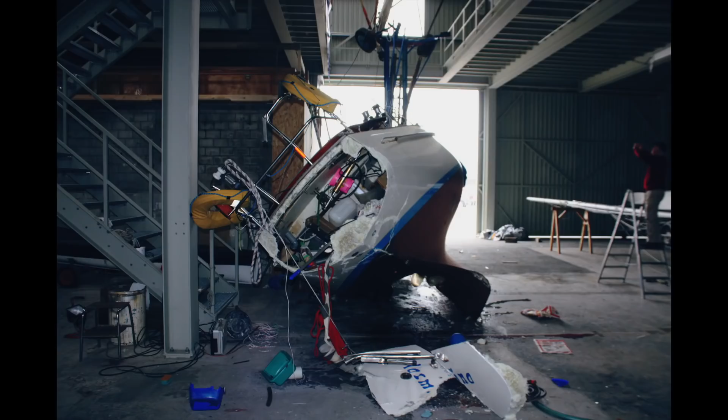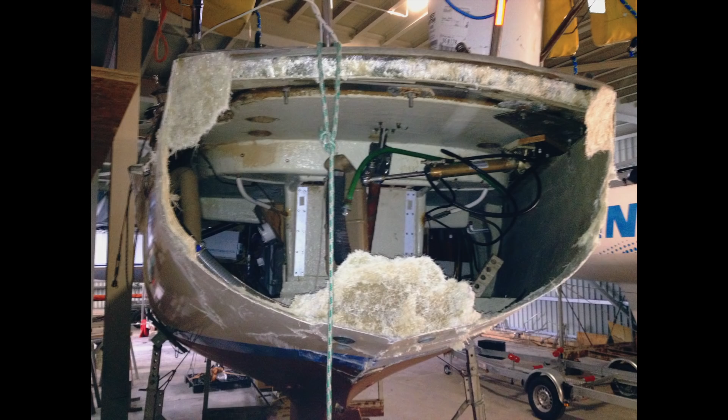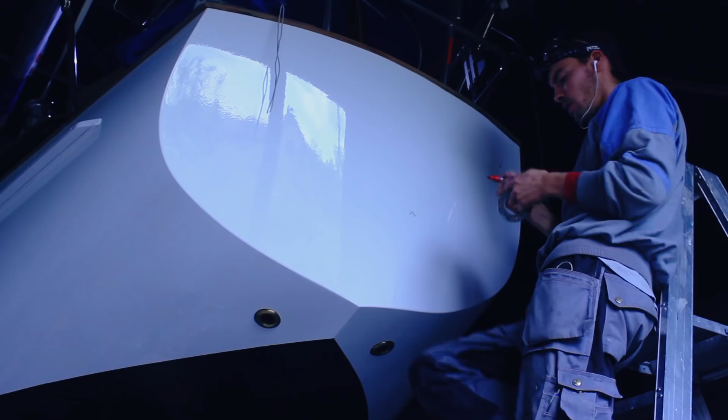In case you're new here, I bought Magic Carpet, a Vindö 32, four years ago. When I bought her, she was a total shipwreck. She had fallen 20 feet from a crane onto concrete. The stern completely blew off, there was a huge crack in the side, the keel was damaged, and the rudder was crushed. At the time, I had just begun a 3-year boat building apprenticeship in Switzerland, so in my spare time I worked on restoring Magic Carpet. Four years later, she's now finally finished and sailing around the Mediterranean.

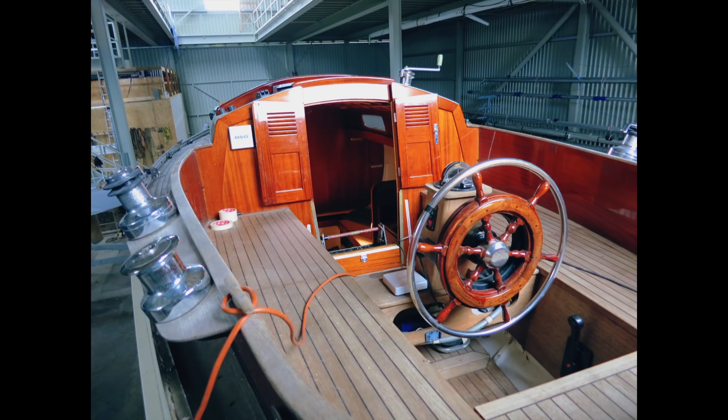During the restoration itself, I didn't take any footage, but this mini-series from the Sailing Magic Carpet channel is about the thought processes, theories, and techniques that I went through to repair Magic Carpet.

This particular video, episode 3, is about the basic principles of doing a fiberglass repair. I made this video for people who are totally new to the world of fiberglass repairs and who want to get an idea of how they work.

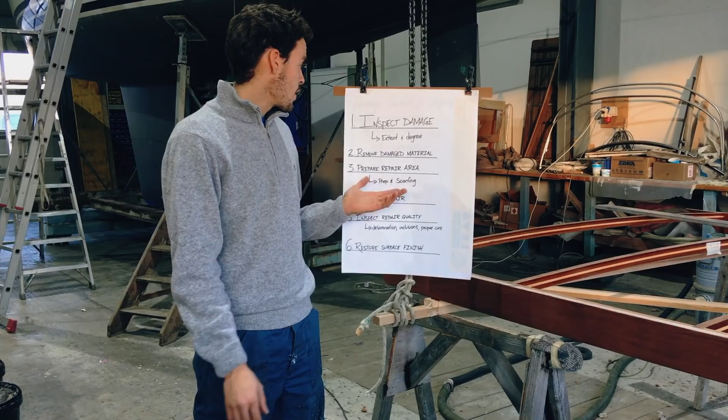I'm going to start by showing you the brief process on how to approach a repair. So this is what you start with: obviously, inspecting the damage. To inspect the damage, you have to get good access to the damaged area. Are there things installed in the boat? Is there maybe something behind it that I don't see? All of that is part of the inspection.

Take a scraper. In my case, the damage was so severe that I don't care about details — if I have to drill another hole or two next to it, it wouldn't change much. If it's a small damage, there might be other tricks, like just knocking on it — how does it sound? Is there some kind of delamination? You don't want to drill a hole to make sure. But in my case, even take the grinder, take some material off with a hammer, really get to know what's behind. Many times with fiberglass, with composite, there are many hidden damages. It might only be a dent on the surface, but it might reach further than that.

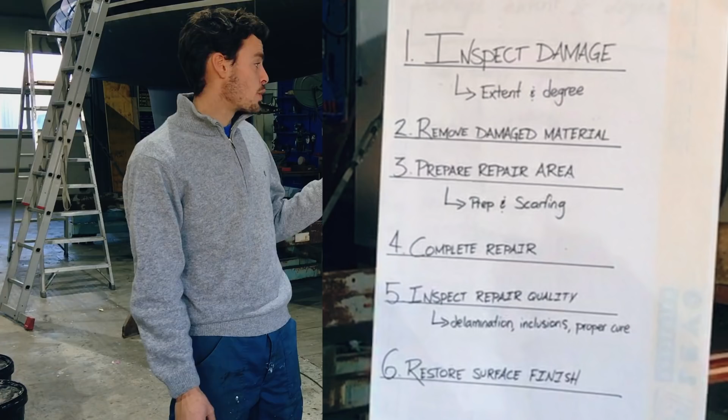So check the extent and degree of the damage. Step 2, remove damaged material. Step 3, preparation of the repair. This is a very important step, which I will dive into further in a bit.

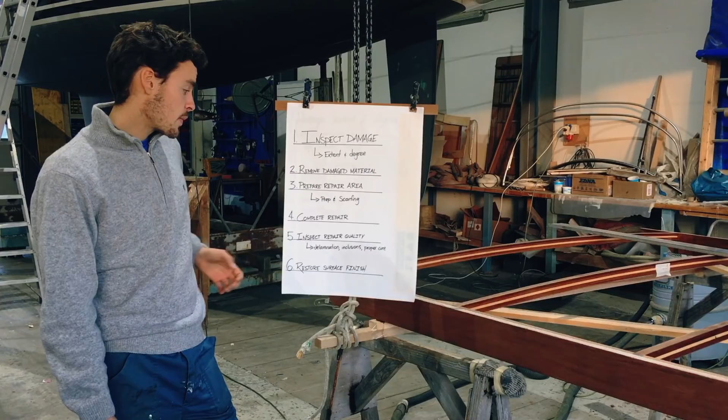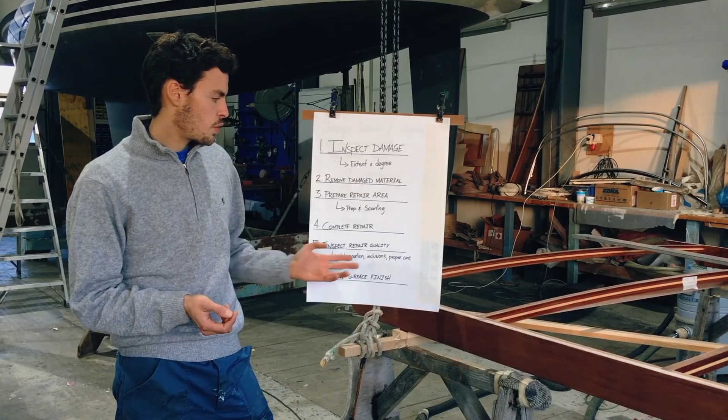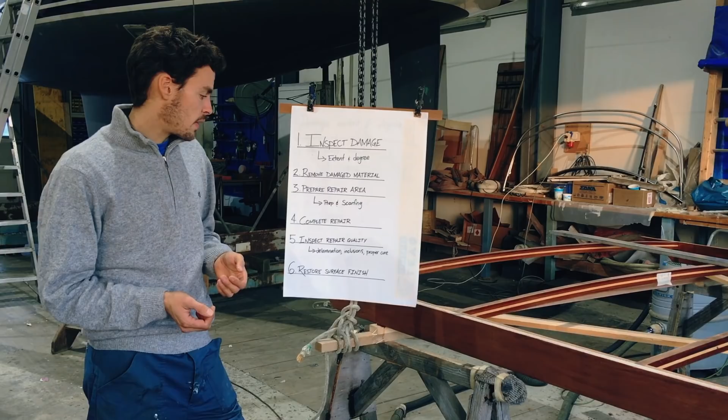Afterwards, complete the repair, and inspect the repair quality. Is there any delamination, inclusions? Did dust go inside, or even air bubbles, which you would not want? And also you check it for proper cure. Was the temperature good? Was it too moist maybe? Was it too cold? Did you get the wrong ratio of hardener and epoxy, or polyester and hardener? Whatever the case, inspection afterwards is just as important.

And step 6 is restoring the surface finish. I plan on making an entire episode just about the surface and the finish, because it includes completely different materials, different tools. But this time, let's focus on the rough part of the repair.

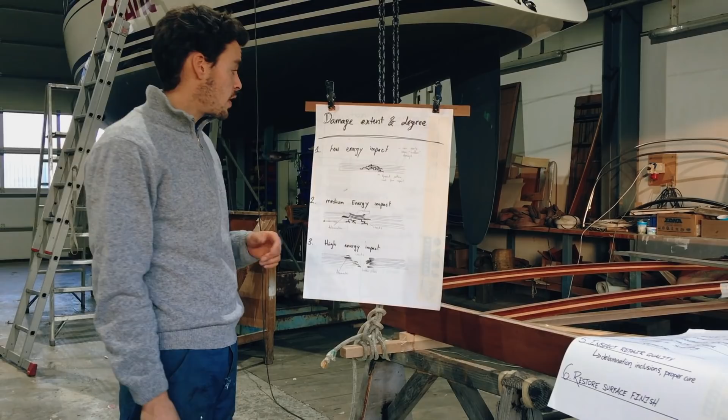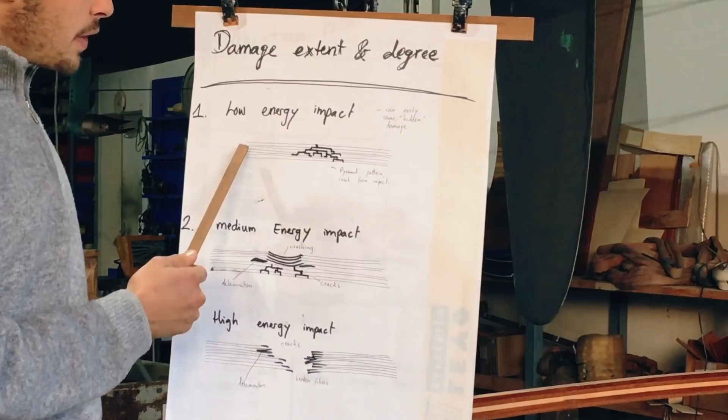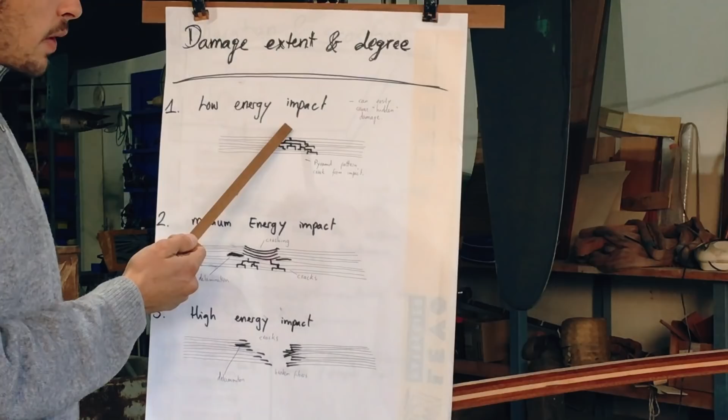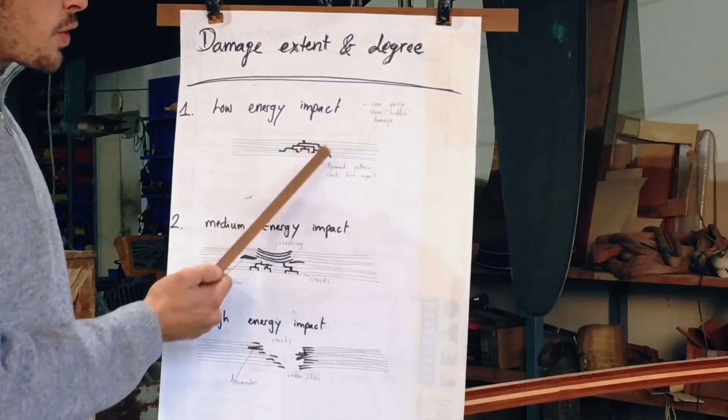So let's dive further into the extent and degree of the damage. I have labeled 3 types of damage here: low energy impact, medium energy impact, and high impact. The low energy impact can easily cause hidden damage. Here displayed we have the layers of fiberglass, and in case of a crack, you might just see a little crack on the surface. But forces tend to travel easily through fiberglass, so it might create this pyramid pattern from just this one crack. So low energy impacts can easily cause hidden damage, since all this is hidden to the eye and you only see that one crack.

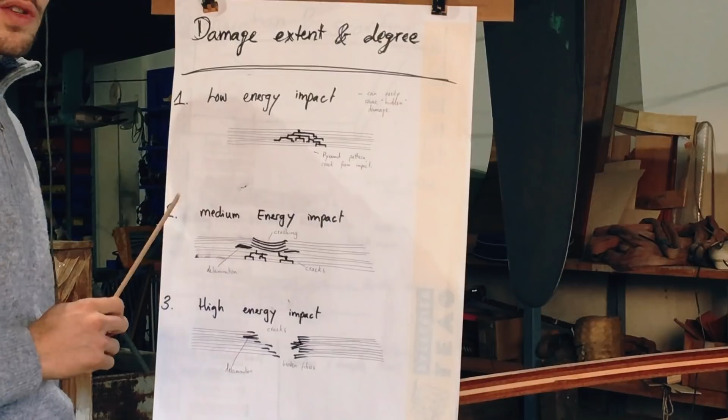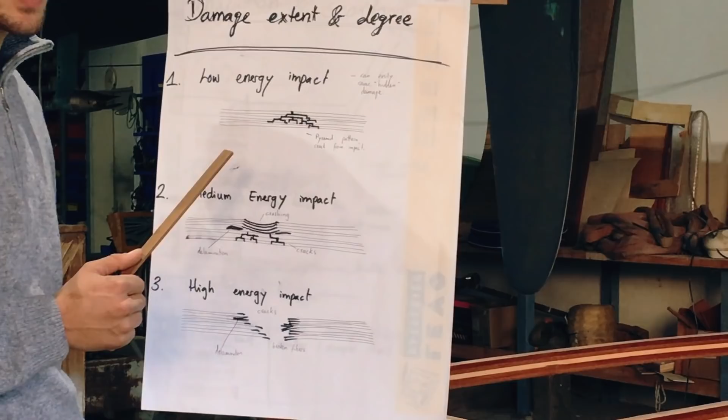So inspection: hammering, sanding a bit. Once you get gel coat and paint off from the surface, you can easily tell if the fiberglass has suffered any damage, if it's not impregnated properly, if it has delaminated, or if there are other cracks. Since fiberglass, depending on what resin you used, it might be kind of yellowish, but instead when it cracked and there is air and delamination in between, it turns white. So you can tell pretty easily upon that.

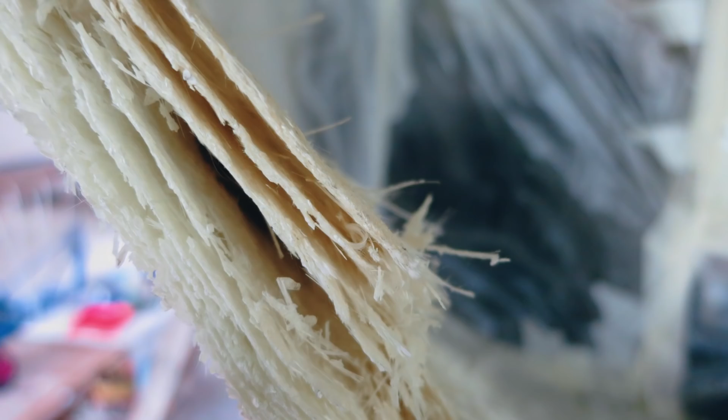A medium energy impact instead is visible to the eye from outside, since you have the area which is crushed. There is a dent, there is a crack, it bumped against something. And here as well, there are cracks inside the fiberglass that reach further than what the eye sees. Also, it is very possible that delamination occurs on the outside area of the crushing. Fiberglass on a finished boat consists of many layers of that woven fabric, so when you get an impact, those might not stick perfectly to each other anymore — they don't have a perfect bonding anymore, so that's what we refer to as delamination.

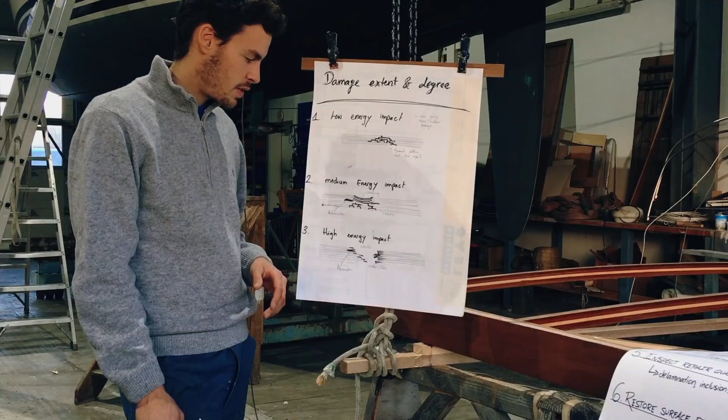Then there is the high energy impact — that's, I think, the case on Magic Carpet. It was all just broken. There are cracks, the fibers are broken, it's through the hull from side to side, delamination — just everything nasty you can think of occurs in that case.

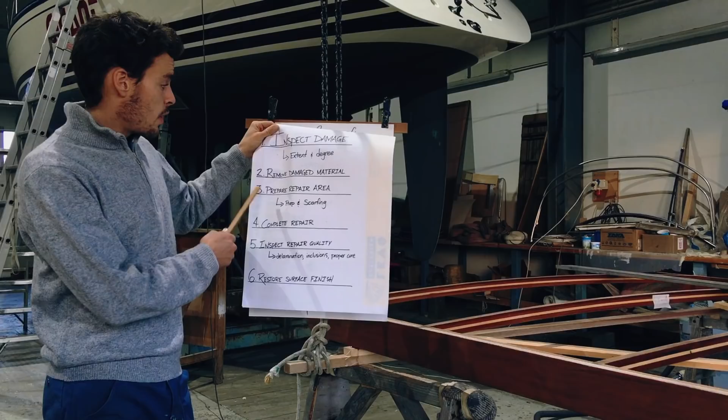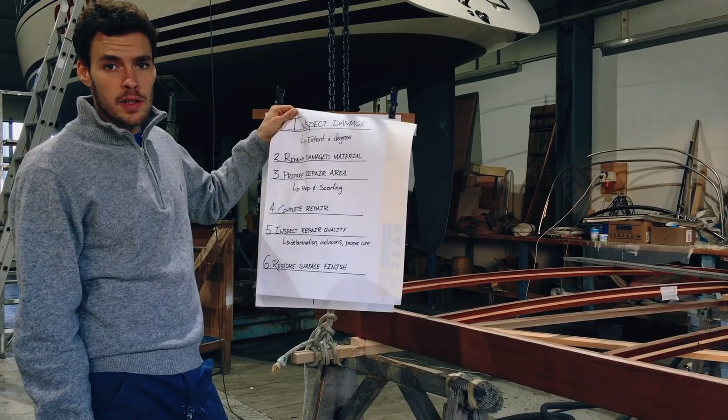Removing the damaged material can be very different depending on the example, on what you have in front of you. In my case, it was a total complete shipwreck, so I went at it with very rough tools - angle grinder specifically, even hammer and chisels - just to get rid of everything that was broken.

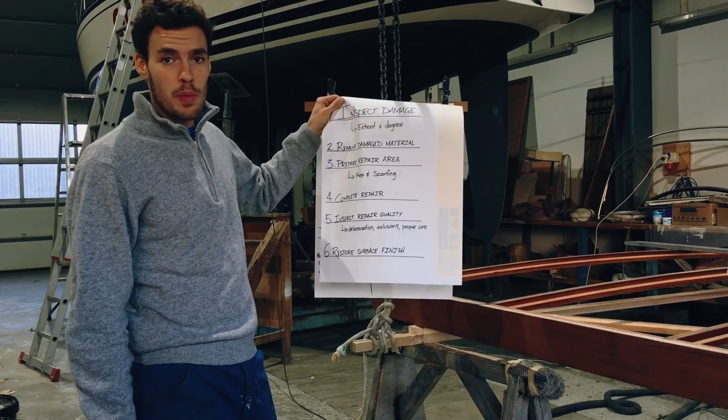Now let's switch to step 3, the preparation of the repair area. Once you have removed all the damaged material, it is very important to prepare that repair area.

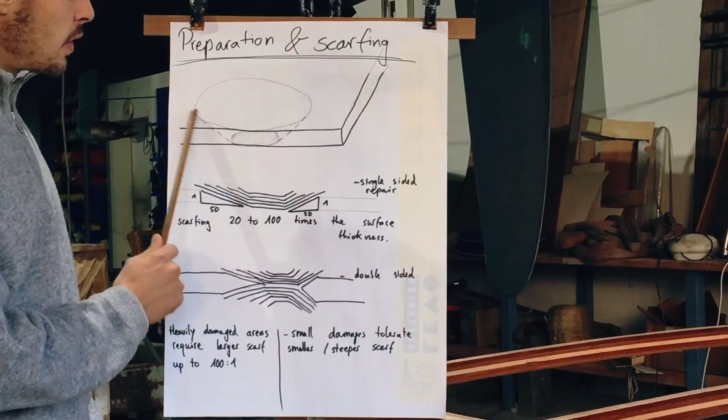One thing is scarfing. That means, depending on the thickness of the fiberglass, you will have to taper the area you repair. There are different methods to approach this.

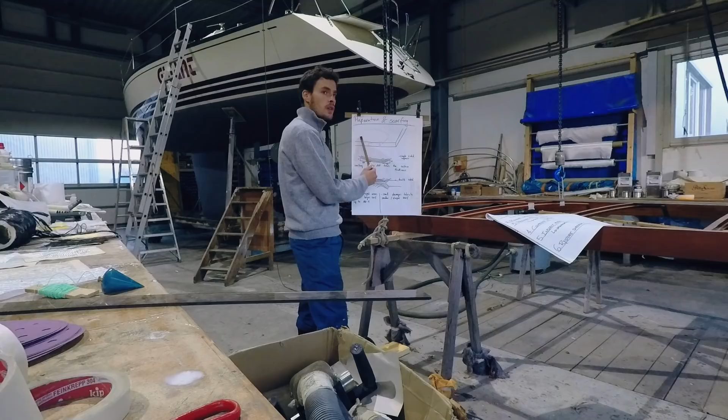One very important thing is you always want to tend to oval shapes when making a repair. If there is any angle or anything square, you have to round it off. Another part of the theory is anything diagonal creates a much bigger surface, and for the best repair you want to give it the biggest surface possible.

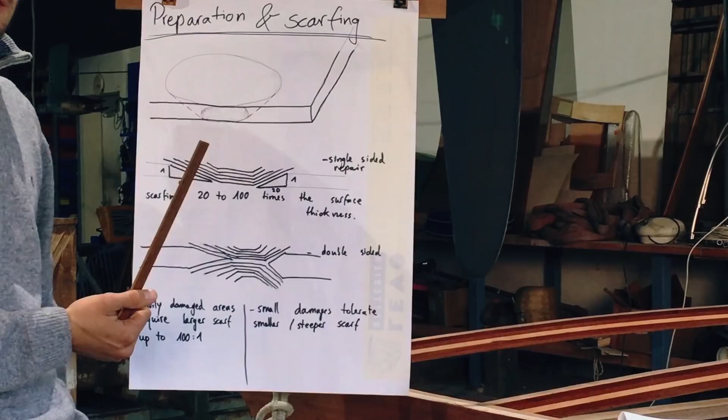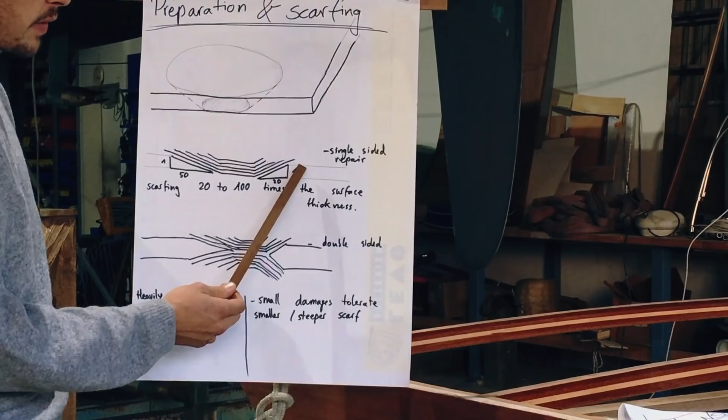So that's why, depending on the extent of the impact, you change the ratio of the scarf you make. If there's a small damage, it tolerates a smaller or steeper scarf. For example, if the thickness of the hull is 1 centimeter, then you make the diagonal line 20 centimeters. If it's a big damage, then to get the strength back, you give it a scarf of 50 or even up to 100.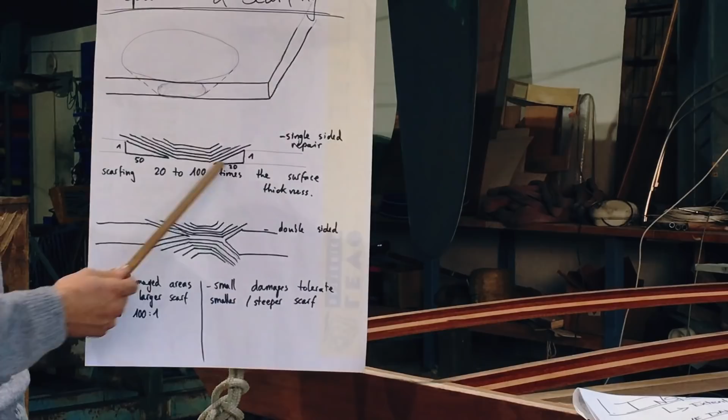There is also the approach of doing a single-sided repair. That means maybe it's only accessible from one side, or there are various other reasons to choose that. In most cases, I did a double-sided repair, or more on one side and less on the other, but mostly from both sides - that is just my preference.

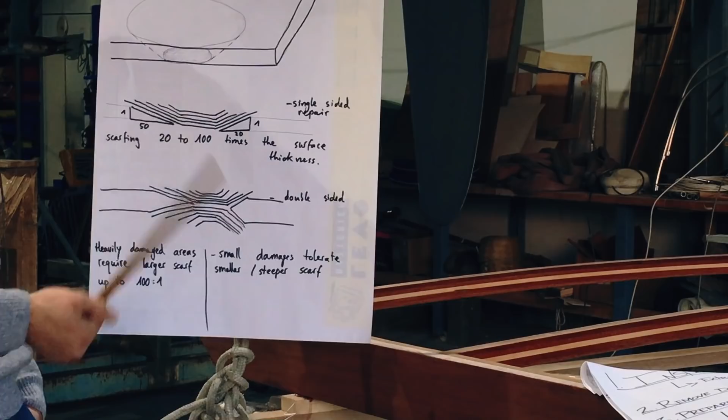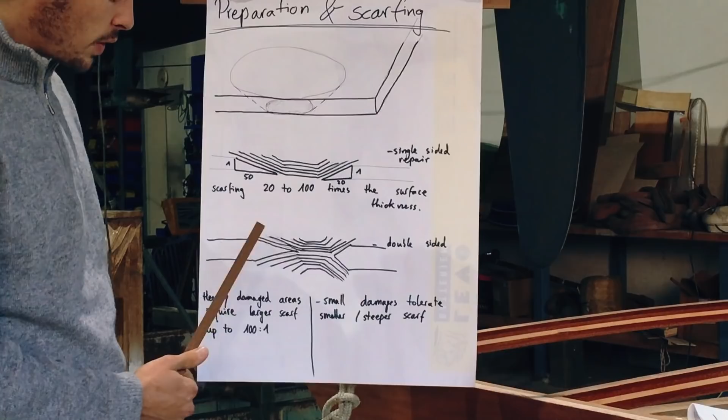If it is accessible, and in my case I made every repair accessible, then it just sounds better to me. And when you do a double-sided repair, the scarf can actually be a bit less since you do it on both sides. I'm sorry, it's a bit of a mess, but I hope you understand what I mean.

So these were the tools required for the very first approach, examination of the damage.

Not always, but after a while of itching fiberglass in my underwear, I discovered that these onesies, the suits by 3M, are very handy. Also when you work with the resins afterwards, they keep your jeans and everything from being sticky.

Gloves, these are for when I'm using the heavy duty tools, to protect my ears, glasses, and a mask. This one should be symbolic for the vacuum. And then very rough tools, in my case, for getting rid of all the crushed fiberglass - so here I have chisels and a hammer.

We use chisels for woodworking, and those we have to keep in excellent shape. So I have another set for banging on fiberglass and doing all the other things you can do with it - make sure it's not the nicest set that you use. And also I was using the bigger ones more, which I use less for woodworking.

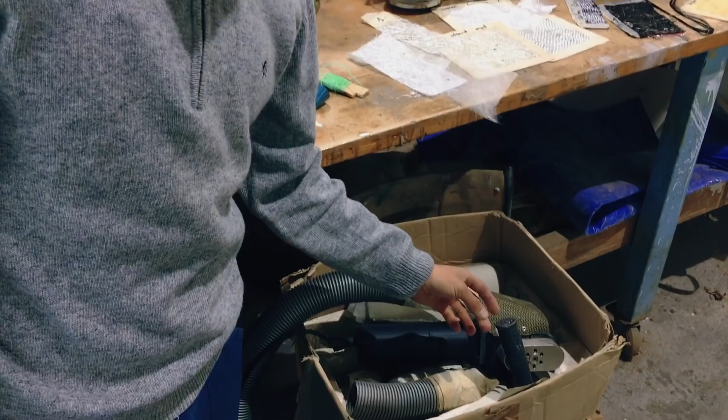I want to show you another tool which I used for the repair. It's not crucial, but since we have one in the boatyard it made it very handy, but I hate it. So you can all be glad not to have one. It's very expensive, and basically it's a gel plane.

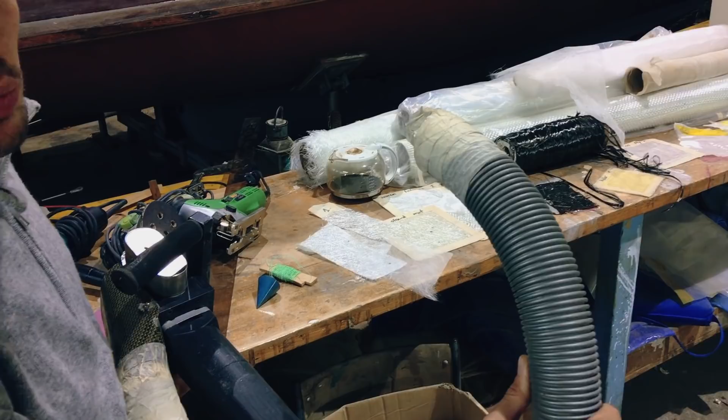I hate this machine, but it was so handy. Basically it's an electric plane which runs at about 3,600 RPM. This diameter of hose is not enough to get all the fiberglass into the vacuum while the machine is running. It's an absolutely hideous thing, but you can get layers of 1 millimeter at a time away. My hole was about 2 centimeters thick, so imagine if I would sand it - or well, a chisel also worked quite well - but once you need something more accurate, the gel plane, the electric plane, seems very handy. I use this on almost every surface, and it works like this.

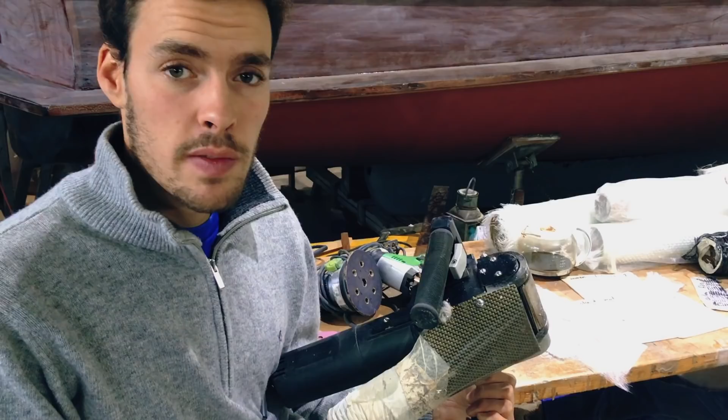Once it's running, you attach it to the hole, and then you have to move down. You switch over just a tiny bit, and then you continue. This tool is mostly used for osmosis repair - that's when the hull gets those nasty blisters which all boat owners might have heard about. This is the osmosis plane, to get rid of the gel coat and the affected layers of fiberglass before you start applying new ones. Hideous machine. Glad we have it.

After showing you some of the important tools, let's move over to fiberglass. What is fiberglass? Basically it's made from two components. One is the structural one, which is the fibers. There are many different fibers - glass fibers, Kevlar, carbon fibers - but those wouldn't be anything without being combined with the resin. So it's always the combination of fibers and resin. There are different kinds of resins, polyester, epoxy, and more, but let's start with the fibers.

I have a few options displayed here. This one is the very basic chopped strand mat. It's glass filaments just randomly laid to create a cloth, and they are held together with a binder.

I'm not sure about this, there might be different binders, but what I have learned is do not use this in combination with epoxy. Epoxy doesn't like the binder used to hold this mat together, so this is only used with polyester. This is very easy to use, it's the cheapest, and it exists in various thicknesses - you speak of it as how heavy the square meter is.

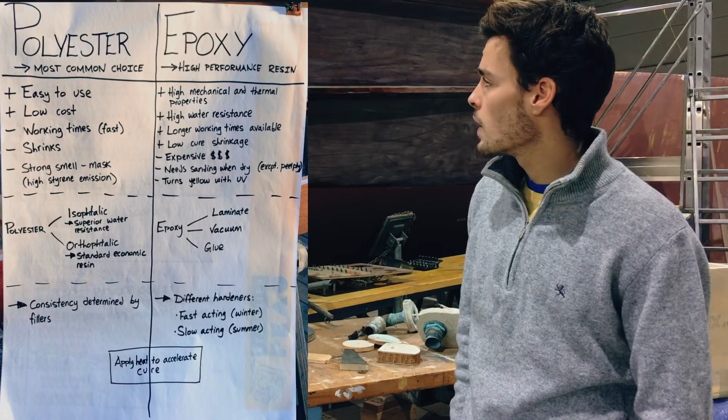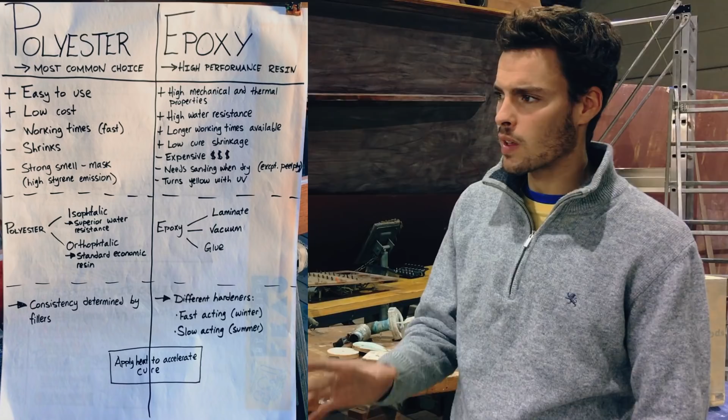So that's a bit of a drawback. It also shrinks. The more additives you add to it, the more it shrinks also. That's to keep in mind. And it emits a very strong smell, so I highly recommend using a mask or respirator when you use polyester. So that's one thing that makes it a little less fun.

There are different kinds of polyester. I just dive quickly into the 2 most common ones. One is orthophthalic, the other one is isophthalic. I'm sorry if I'm saying it wrong, I just know the terms from German. Basically, the isophthalic one has a superior water resistance, and the orthophthalic is just a standard economic resin.

I used only the superior water resistance one. It's a bit more expensive, but I had many repairs below the water line, so it makes sense to have something more water resistant.

And then as to epoxy, there are different types. There are epoxies which are more liquid right away, and there are epoxies which are denser. So it depends what you want to do. If you want to work with vacuum, you want something that goes everywhere, that is very liquid. If you use it for bonding or gluing, then you want something else.

Also with epoxies you have different hardeners. That's quite handy. For example, in summer you take a slow hardener, so that gives you more time to work with. Instead, in winter you use a quick hardener, so it activates and hardens quicker.